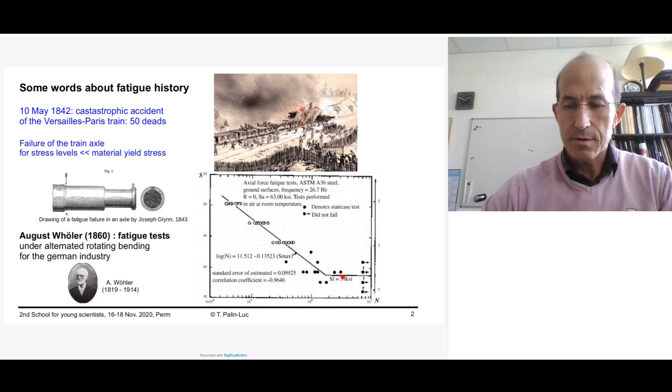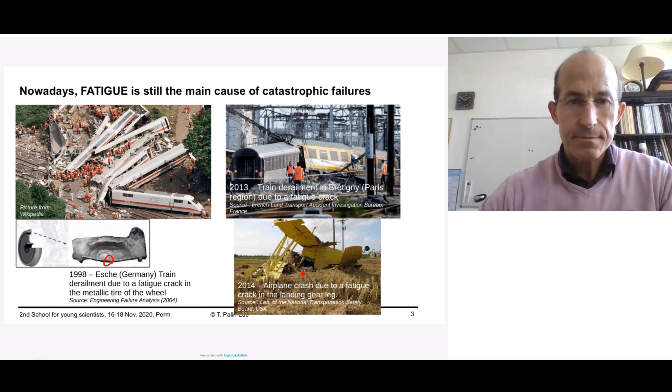So now, what is known about the crack initiation mechanism? As I introduced previously, the famous Wöhler curve, or SN curve as it's named in the US, plots stress amplitude versus the number of cycles in logarithmic scale, giving the variable stress amplitude acceptable by a material or a component with regard to the number of cycles.

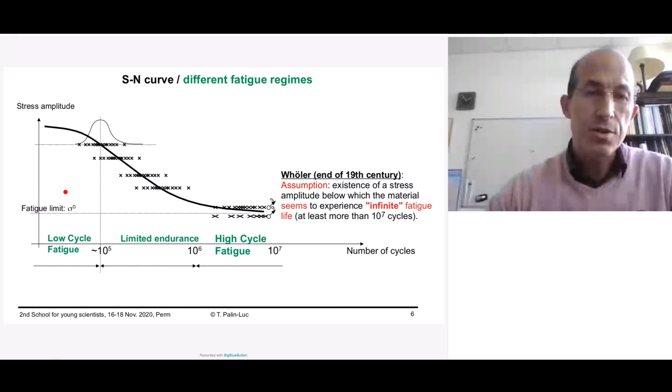Three typical domains can be recognized in this curve: the low cycle fatigue domain, where there is macroscopic plastic strain, approximately up to around 10 to the 5 cycles; then a domain named limited endurance, approximately one decade; and above a few million cycles, there is a high cycle fatigue regime, characterized by macroscopic elasticity, which we will see in a few minutes. This curve has a typical shape with a horizontal asymptotic tendency, which led Wöhler to assume that an infinite fatigue life exists after approximately 10 to the 7 cycles. The existence of this fatigue limit has helped engineers design a lot of structures during the last two centuries.

The fatigue crack initiation phenomenon is characterized by typical features. If you compare the stress level during a monotonic quasi-static tensile test with the fatigue phenomena, you cannot see anything similar in fatigue. During a macroscopic tensile monotonic quasi-static tension test, many macroscopic events like plastic flow above the yield strength, then necking, then failure are characteristic, and if you load the material after yielding there is macroscopic plastic strain. But in high cycle fatigue, for stress levels leading to life greater than approximately 1 million cycles, the stress levels are below the yield strength of the material, and in this case you cannot detect any irreversible phenomena at the macroscopic scale.

But irreversible phenomena exist at the mesoscopic or micro scale. Consequently, fatigue of materials is due to modifications or degradation of the mechanical properties of materials under cyclic loading or thermal cyclic loadings, which creates microscopic irreversible phenomena.

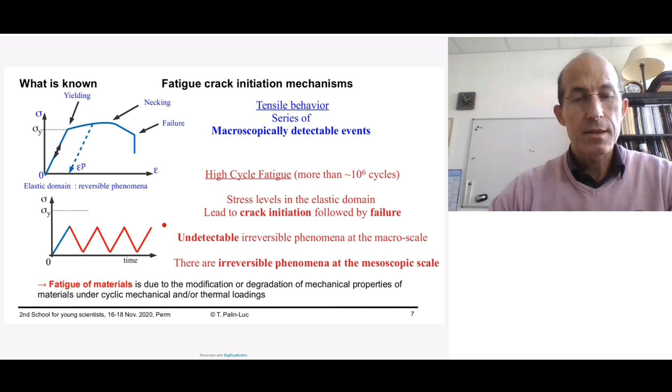These irreversible phenomena start from dislocation in polycrystals, because my talk is restricted to metallic alloys, which are polycrystalline materials. The evolution versus the number of cycles on a pure alloy, this example is on pure iron, loaded up to approximately 1 million cycles. You can see in this picture the evolution of the dislocation density versus the number of cycles. The dislocations appear in black in these transmission electronic microscope pictures.

You can see in this diagram, which plots the dislocation density versus the number of cycles in logarithmic scale, there is an increase of the dislocation density during the beginning of the cyclic loading, up to approximately 100 cycles, and then a saturation plateau. And if you continue the test up to fracture, there is an avalanche phenomenon which creates the crack initiation.

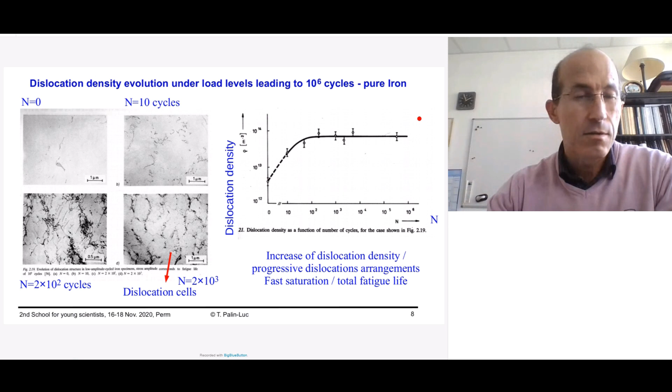After saturation, the localization of the plastic deformation process at the microscopic scale will lead to a collective behavior of dislocations that will create slip bands and then persistent slip bands. It means the collective behavior of dislocations will create, in the crystals or in the polycrystals, some veins which emerge at the surface of the material.

You can see here a scheme of that. In the grain, the red lines illustrate the veins, or the channels of dislocation movement. These dislocations emerge at the surface and will create persistent slip bands which appear at the surface. So these bands are oriented along the directions of the easiest glide directions.

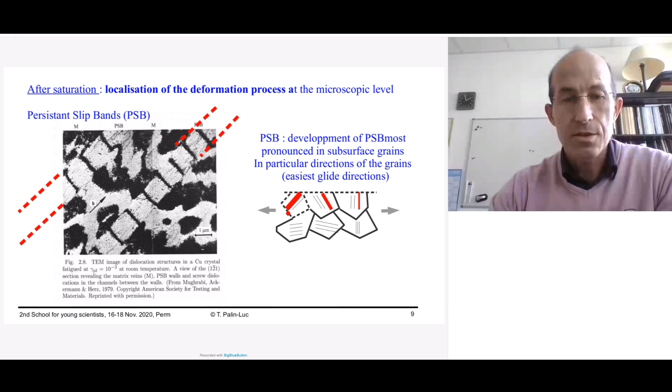You can see here an illustration of such bands. Here you can see the surface of the material and the appearance of extrusions, which are schematically illustrated here with the PSB and the extrusion. And since under cyclic loading, of course, no material is created, if there is extrusion in some area, in other locations there are intrusions. And these intrusions are the precursor, or the locations, of crack initiation.

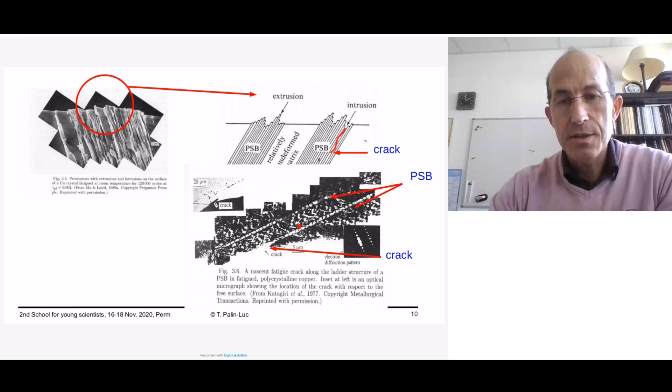You can see here another picture. The surface is at the bottom, and you can see here the bands, and here the beginning of the crack, which is created along the intrusion.

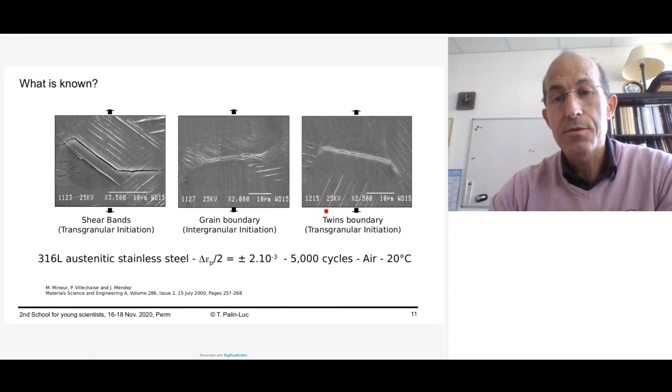We can also observe crack initiation at the grain boundary, but close to the boundary of grains, you can observe slip bands. Finally, the incompatibility of deformations between two grains leads to decohesion between grains, and so the creation of an intergranular crack. It is also possible to observe, within a single grain, a transgranular initiation because of twin, because twin is a defect in the symmetry of the grain or of the crystal.

If I want to summarize the crack initiation mechanisms in high cycle fatigue, mainly the crack initiates at the surface. This is the most common case of crack initiation, from low cycle fatigue to high cycle fatigue, whatever the number of cycles. The difference between low cycle fatigue and high cycle fatigue is that in high cycle fatigue, the crack initiation is very localized. We will come back to that in a few minutes.

So the initiation causes are mainly these. There is usually the appearance of persistent slip bands at the surface within one grain, which indicates transgranular initiation. You can also observe intergranular crack initiation, so between two grains, or along the grain boundary. And it is also possible, of course, to have some defects at the surface, like gas pores for a cast material, or shrinkage, or also inclusions in non-pure materials.

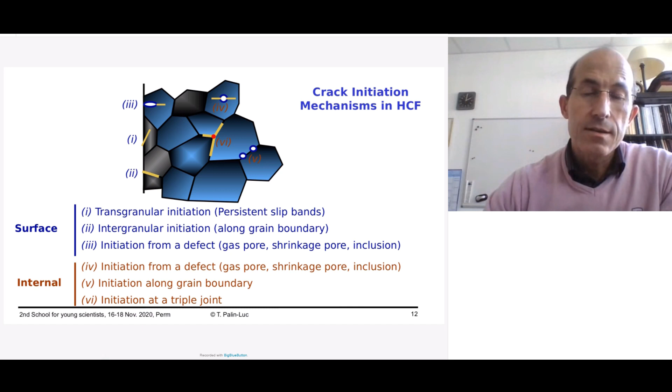Non-pure materials are the case of the most common industrial alloys, where there are always some pollutants, some non-metallic inclusions, etc. In some cases, it's also possible to observe internal crack initiation, even in low cycle fatigue or high cycle fatigue, but they are not very common in pure materials. They are common in industrial alloys because of defects. So again, the defects play an important role, like the pores, the shrinkage, and so on. One also observes initiation along a grain boundary with the presence of defects. And in some cases, which are rare, we observe initiation of a crack at the triple joint.

What's happened after crack initiation? The crack initiation is illustrated here by the nucleation of the shear bands, mainly at the surface, or in most cases, as I explained a few minutes ago.

If you imagine a polycrystal loaded in uniaxial tension, the first stage, named stage 1 in literature, is the appearance of a crack due to shear. That is mode 2 of fracture mechanics. And when this crack is long enough compared to the characteristic size of the microstructure or the grain size, meaning when the crack has a length equal to approximately 5 grains, the crack bifurcates and begins to grow perpendicular to the principal stress. So we are now in the case of long crack growth.

So it is important to understand that the crack initiation is governed by the crystallography and by shear. And when the crack is long enough, the crack propagation is governed by the macroscopic principal stress, that is the opening stress or the principal stress.

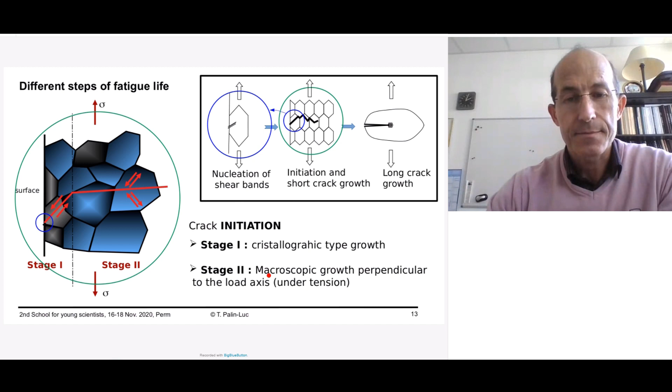This can be summarized in an SN curve depending on the different fatigue regimes, by the following scheme. In low cycle fatigue, macroscopic plastic deformation exists everywhere in the material. Consequently, there is generalized plasticity. Each grain is plasticized, so there are persistent slip bands or slip markings everywhere. This is a regime of low number of cycles to failure.

Then there is a transition. When you decrease the stress amplitude, there is a transition between macroscopic plasticity and elasticity. In high cycle fatigue, macroscopically the material is elastic, so plasticity appears at a micro scale. It means the slip markings are localized in a few grains at the surface and are due to persistent slip bands. And the crack initiation appears in intrusions located at these bands.

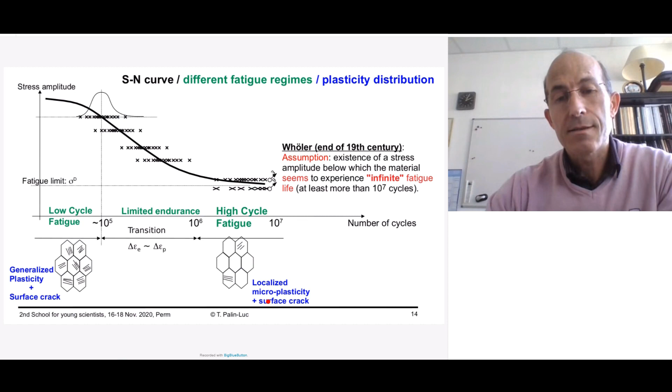Now, if we continue, I mean if you do not stop a test after 10 million cycles with a non-broken specimen, what do you observe? Such experiments have been carried out since the end of the last century by a lot of researchers in Japan, in Germany, especially in France and in the US, and they are named the gigacycle regime or the very high cycle fatigue regime.

It has been demonstrated that in this case, infinite life doesn't exist. It means the assumption made by Wöhler about a fatigue limit was false. In fact, if you have enough time, if you continue the test up to 10 to the 9 or 10 to the 10 cycles, the material exhibits mainly internal crack initiation with the famous feature named fish eye. Such fish eyes are observed typically on industrial alloys.

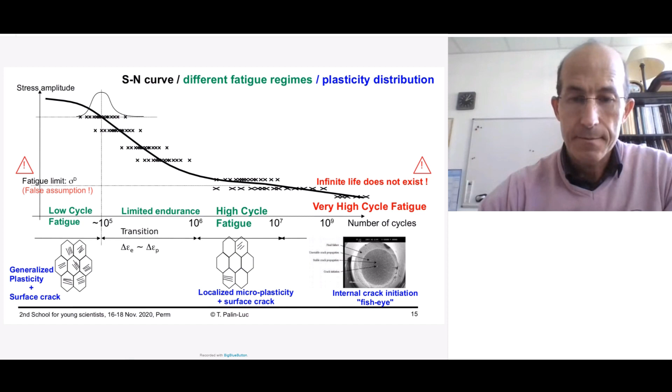The consequence of such evolution of the fatigue crack initiation mechanisms is very important for engineers designing structures, because if you look at the ASTM standard, there is a typical SN curve with the asymptotic tendency according to Wöhler's assumption. In practice, this asymptotic tendency corresponds to 10 to the 7 cycles, because at that time it was very difficult to run many more cycles in a test within a reasonable testing time.

But if you look, for instance, at the famous experiments by Professor Sakai in 1999 on a bearing steel, you can see that if you exceed 10 to the 7, if you go to 10 to the 9 or 10 to the 10 cycles, the asymptotic tendency doesn't exist anymore, and there is crack or failure. So there is no infinite fatigue life.

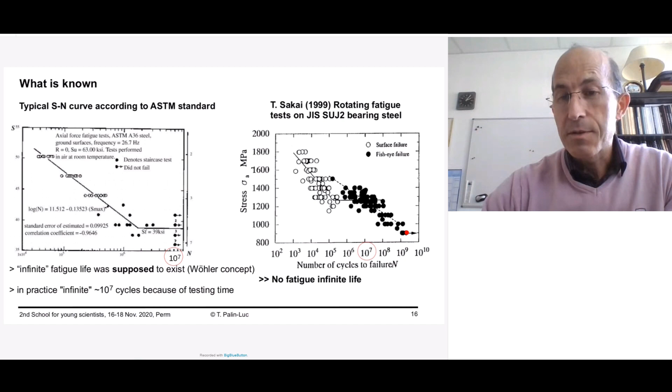So the internal crack initiation appearing in the gigacycle regime, when the load level or stress amplitude is low enough, leads to this typical fish eye. Within the center of the fish eye, the part responsible for the crack initiation is an inclusion.

Other experiments and a review of many fatigue tests proposed by Professor Mughrabi in 2002 show that, in fact, on pure metallic alloys, the mechanism of slip band crack initiation at the intrusion-extrusion is still valid, but there is no threshold for persistent slip band appearance. It is a question of number of cycles. If you decrease the stress amplitude but wait for enough loading cycles, finally slip markings appear at the surface, and finally cracks initiate.

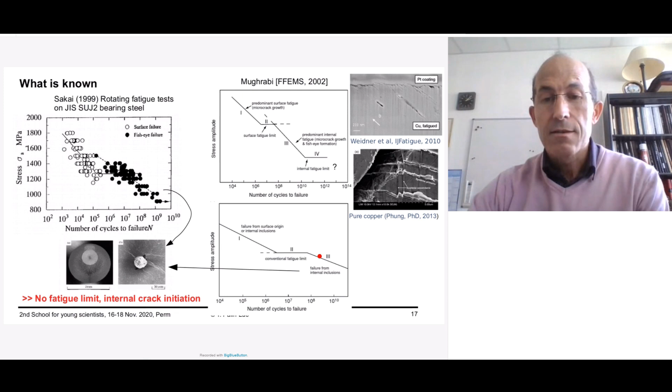So up to now, no tests have been done above or at 10 to the 11 cycles, so we don't know if there is a real threshold for persistent slip band appearance. This is a question. But for industrial alloys, there is always crack initiation on industrial defects like inclusions.

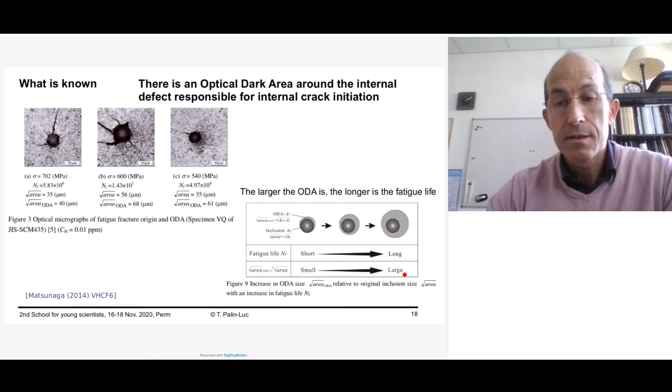So up to now, we don't know exactly why there is this optical dark area. We will come back to that in the challenge.

So to summarize what we know about crack initiation mechanisms: high cycle fatigue failure and very high cycle fatigue failure are due to microscopic cyclic plasticity. Dislocations and the appearance of persistent slip bands at the surface of the alloy are responsible for these crack initiations. The initiation first starts in mode 2 of fracture mechanics, meaning crack initiation is governed by shear, because shear governs microplasticity.

Then the microcracks propagate up to long cracks and bifurcate when the crack length is large enough compared to the characteristic size of the microstructure, then propagating in mode 1. This is stage 2 of crack propagation.

Another important thing that is well known is that in metallic alloys, crack initiation is mainly governed by the surface of the material in high cycle fatigue and low cycle fatigue. But when the number of cycles to failure increases up to 10 to the 8 or 10 to the 9 cycles and more, in the very high cycle fatigue regime, crack initiation shifts from the surface to the core of the material, and non-metallic inclusions are responsible for this crack initiation in the core.

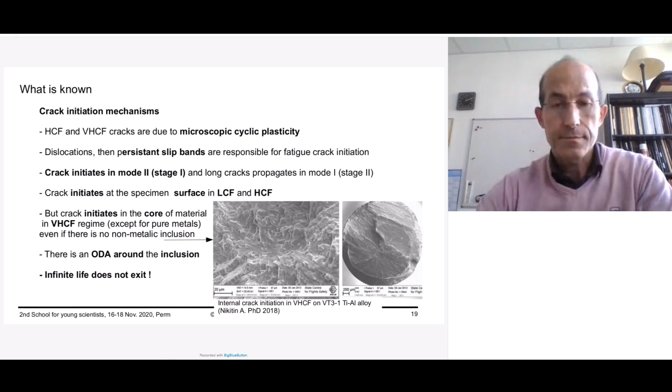Now I'm talking about the factors influencing fatigue crack initiation - what are the technological factors responsible for crack initiation in components? We will see four main factors: surface roughness, quality of the surface, residual stresses, stress concentration factors or notches, illustrated here for instance with a key seat on a shaft of a motor, and material defects, either due to the manufacturing process of the material or the process to produce the components. Of course there are many other factors, but because of lack of time I cannot present all of them.

For industrial applications, temperature has an effect on crack initiation. There is also an effect of component size, because the larger the specimen or component, the higher the probability of finding defects. The environment also plays a role because of corrosion problems or corrosion aggression on the material, and hydrogen embrittlement also plays a role in crack initiation and propagation. In some cases, for specific alloys, loading frequency also matters, though this is less frequent. We consider that in metallic alloys, if the loading frequency is lower than approximately 200 or 250 Hertz, there is no effect.

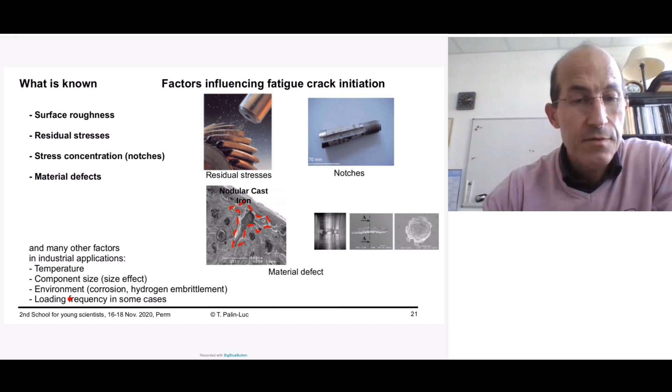Now, first about surface roughness. A typical SN curve, stress amplitude versus number of cycles, illustrated here by Professor Itoga from Japan, shows this: the famous SN curve with different plateaus representing the evolution versus number of cycles from low cycle fatigue to gigacycle regimes. If you increase the surface roughness - meaning the profile height is worse and worse, as you can see here - you will decrease the bearable stress amplitude, or in other terms, the material reduces its fatigue life for a given stress amplitude.

This is illustrated also in this SN diagram on a titanium alloy produced by selective laser melting, which is an additive manufacturing procedure. These data come from a PhD thesis in my institute on a titanium alloy. You can see that in black, this is roughness produced by hot rolling, and in red is as-machined, as built by SLM.

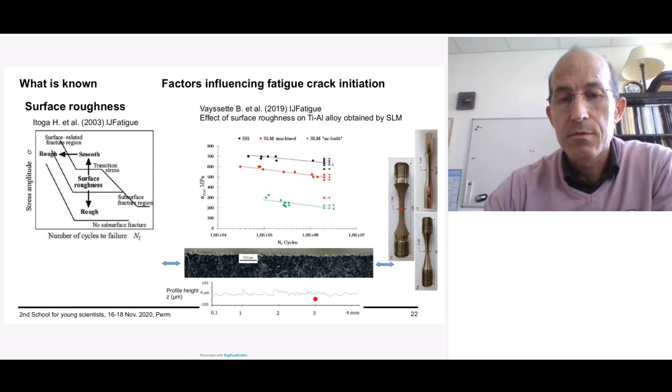In green, this is an as-built SLM surface with bad quality. You can see here the roughness, which is very bad. The scale here is 500 micrometers. So if you do not machine the roughness to improve the surface quality, you have a very sharp decrease of the fatigue resistance, approximately a factor of 2. This proves that roughness is very important in fatigue resistance, because the valley of the roughness profile plays the role of a micro notch.

Another important factor in real components are the residual stresses. Residual stresses are the stress inside the material without external loading. Of course, they are in equilibrium, but they are produced by external loading in order to reinforce or modify the surface layer of the material or the components. A typical treatment is shot peening. Shot peening produces plasticity at the surface, and this plastic region is compressed by the rest of the material surrounding it. The elastic material compresses the plastic zone.

So this treatment is very well used in industry, for instance, in order to increase the fatigue resistance of gears. Another treatment is laser shock peening, where there is no ball creating plasticity, but a laser impact which produces a plasma, and the wave due to this plasma creation will produce plasticity.

So the consequence of such surface treatment is that if you look at the residual stresses versus the depth of the material, you obtain such a profile: a compression state at the surface, and in the depth, a peak in tension in order to have the equilibrium. The peak in compression at the surface is very good for fatigue resistance, because the compressive residual stresses are a static stress in the material which opposes the tensile opening stress of the cyclic loading. So the compressive residual stresses will increase the fatigue resistance.

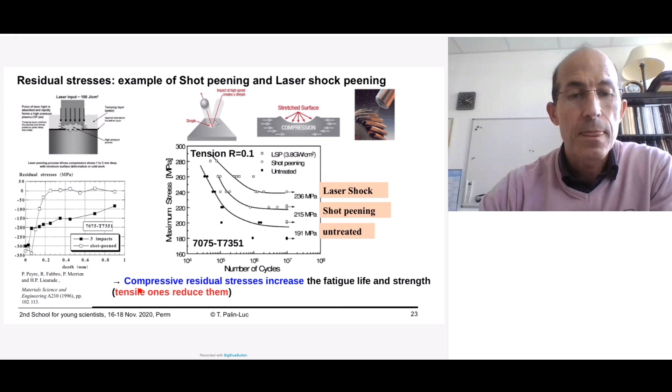You can see an illustration in this SN curve in tension with a positive mean stress on an aluminum alloy. The reference material has a fatigue resistance around 190 megapascal, and it is increased by shot peening or laser shock peening by a significant factor. So this is very important in fatigue, for designing components, to consider the residual stresses. They are favorable to fatigue resistance in compression, and they are deleterious if they are in tension.

What is also known is that on components, the stress concentration due to the notch of the geometry plays a role of stress concentration, and consequently, since the local stress is increased, the fatigue resistance is decreased, as illustrated here on an SN curve. You can see the smooth specimen here with a theoretical stress concentration factor close to 1. When it increases, the fatigue resistance decreases very significantly, because, be careful here, this is a log scale.

So for instance, at 10 to the 7 cycles, the fatigue resistance could be around 90 megapascal, whereas it was around 300 megapascal on the specimen. This is very important for design, because the reason for many failures of real components is illustrated here by an example of a crack failure originating at the key seats on the shaft of a huge diesel engine.

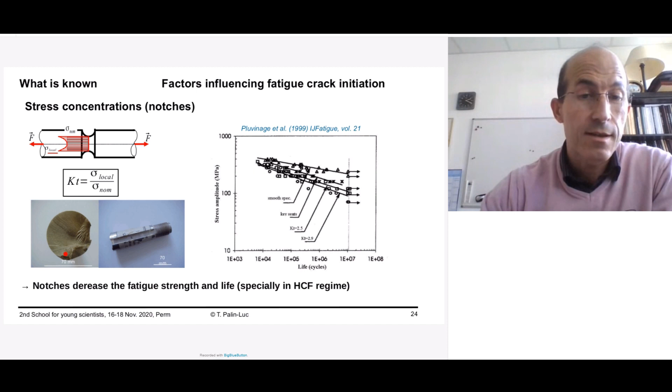But in real components, there are also defects, and the defects, as I said, are also a micro notch, geometrically or mechanically speaking, with a scale here of typically 200 micrometers. This notch can also exist at the root of a macroscopic notch, or at the root of a gear's tooth, for instance. There is a competition between the stress concentrations, which promote crack initiation, and the defects.

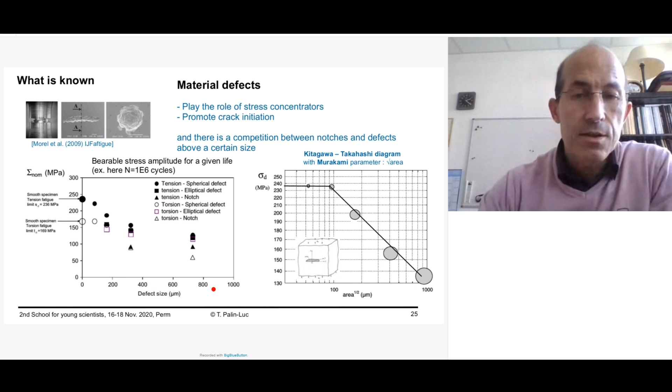So now, what about fatigue modeling? There are many models in literature, more than 50 fatigue strength criteria, and maybe 50 more, or 100 more, for fatigue life calculation methods.

They are classified in two main categories: stress or strain-based approaches and energy-based approaches. In the stress-strain-based approach, there are global approaches based on invariant quantities and critical plane approaches. These critical planes are the most famous because the crack initiation is oriented along one direction of a plane. So there are macroscopic approaches like Matake and McDiarmid, and also mesoscopic approaches, which consider the microplasticity at the grain size.

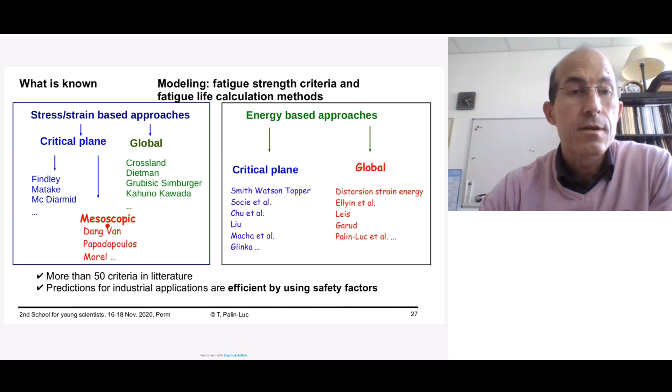There are also energy-based approaches, again with an oriented critical plane approach and a global approach. I don't have enough time to present everything, so I will present two approaches from the stress-strain based category.

Before presenting these two approaches, it's necessary to emphasize two very important stress effects in high cycle fatigue regarding mean stress. If you consider a cyclic loading with different mean stress, and the cyclic loading is a normal stress—meaning a tensile stress—the tensile stress has a very important effect on the fatigue resistance. If you plot the variable stress amplitude versus the mean stress, this diagram is called the Haigh diagram. You can see a very important effect of the positive mean stress on the variable stress amplitude.

There are different models, but all predict an important effect when you increase the tensile mean stress. But on the opposite, if you look at the shear stress amplitude, depending on the mean shear stress in high cycle fatigue—around 10 to the 7 cycles and more—there is no effect. You can see a plateau here. The stress amplitude in shear is not affected by the mean shear stress, approximately up to a maximum shear stress equal to 80% of the yield strength in shear. This is very important because all simulations consider these two effects.

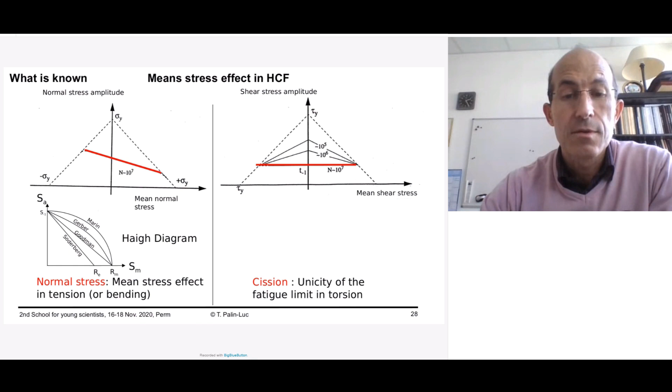What is the general principle of multiaxial high cycle fatigue strength criterion? It is the following: you have a component here submitted to cyclic loading or cyclic forces. At each point of the component, you compute the stress tensor versus time. Representative quantities of this stress and strain have to be used in mathematical equations for a given survival probability.

If I illustrate that in a two-variable diagram with criteria that are the most common, there is a threshold plotted in blue corresponding to a given life—for instance, 10 to the 7 cycles—and a given survival probability, typically 0.5. If the point representing a material point on the component is above the threshold, it is a dangerous case: crack initiation will appear before the given number of cycles with a given failure probability. On the opposite, if the representative point is below the threshold, it is in the safety domain—according to the model, there is no risk of crack initiation before the given number of cycles and for the probability you are considering.

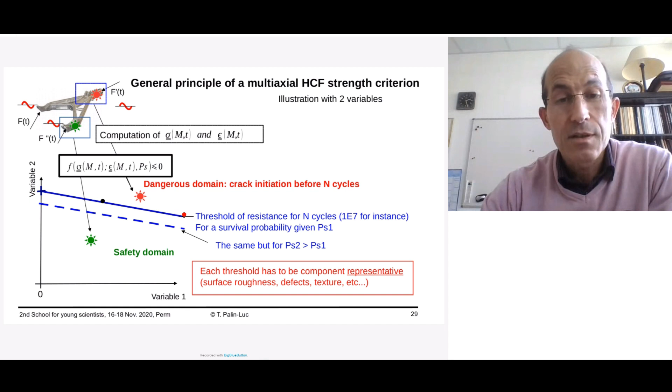Each threshold has to be representative of the material state and of the component state—meaning representative of the defects, the roughness, the texture, etc.

Which quantities are used to compute such mechanical approaches? Since the crack initiates on the material plane in the polycrystal, the authors of the criteria use quantities defined on the plane. The quantities defined on the plane in mechanics are the normal stress—so there is the stress amplitude and the mean stress on the plane—and also the shear or shear amplitude on this plane, and the mean shear stress on this plane.

They are also computed with an invariant approach. A stress tensor can be divided into a deviatoric stress and a hydrostatic or spherical part. Consequently, you can define the amplitude and value of the hydrostatic stress, and also the amplitude and mean value of the deviatoric shear stress tensor, which is given by the square root of J2. J2 is the second invariant of the deviatoric stress, or, if you want, the von Mises equivalent stress.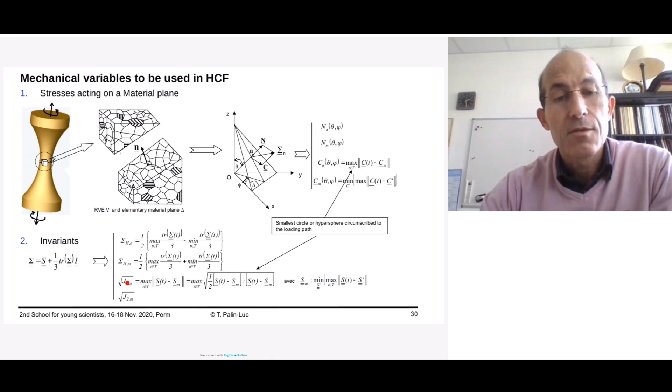So on a plane, we can illustrate that as the following. On a given material plane delta with a normal n, there is a normal stress and a shear stress, which are the two components of the stress vector at each time t. So the extremity of the vector of stress describes the load path, and its projection on the plane, as you can see on the right, is used to define the mean shear stress and the shear stress amplitude.

So the mean shear stress is the center of the circle surrounding the load path, and the amplitude of the load path is nothing else but the radius of this circumscribed circle to the load path. This is important because this definition is invariant, whatever the loading is, proportional or not proportional, complex or not.

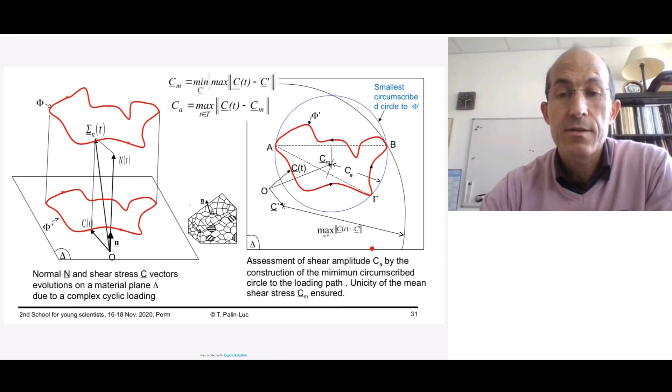In the literature, as I said, there are many criteria: empirical ones, strain-based criteria, energy-based criteria, stress-based criteria, macroscopic ones and mesoscopic ones. I'm presenting you today only criteria based on a stress-based approach, with critical plane approaches at the macro scale and at the meso scale.

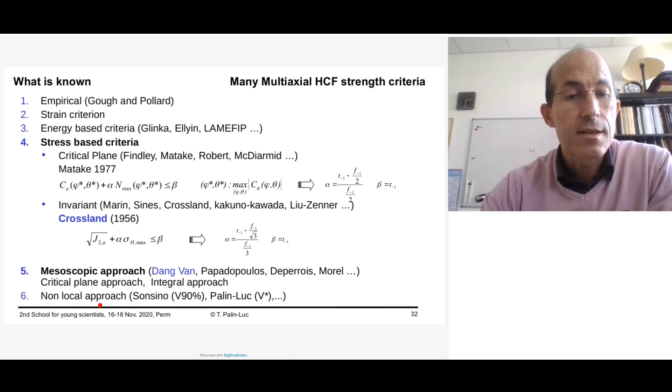I'm presenting one approach at the macroscopic scale, named the Crossland approach, which is a linear combination of the hydrostatic stress and the amplitude of the deviatoric invariant. I'm also presenting in a few minutes a mesoscopic approach proposed by Dang Van, the pioneer in the mesoscopic approach. We will see that they are nowadays used also for numerical simulations. It's important to show that there exists a non-local approach to predict the effect of the notch, but I don't have enough time to present that today.

So first, the Crossland criterion is based on two important hypotheses. I told you that the mean shear stress has no effect on fatigue resistance in high cycle fatigue. Crossland uses this assumption, and also uses the fact that if there is a micro defect, the opening stress of these micro defects in all directions, which is hydrostatic stress, is very deleterious to the crack initiation phenomenon. So he proposed the simplest combination of a shear amplitude, since there's no effect of the mean shear stress, with a linear combination of the macroscopic hydrostatic stress and its maximum value.

So the maximum hydrostatic stress is easy to compute. This is the maximum value of the trace of the stress tensor at each point. The amplitude of the deviatoric shear stress is defined by this equation, which is nothing else than the radius of the sphere in the deviatoric space - the radius of the hypersphere surrounding the load path in the deviatoric domain.

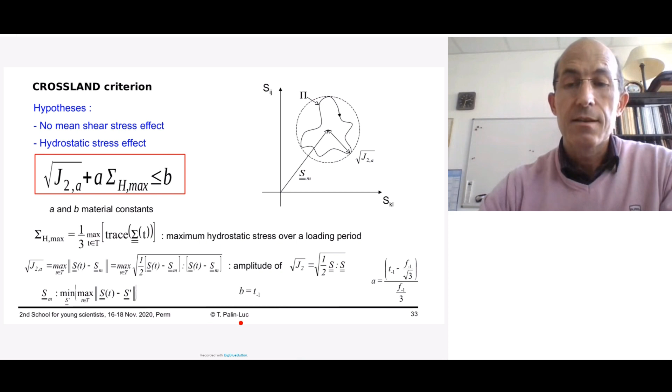Another approach, which is very famous, is the Dang Van one, based on the assumption that to prevent crack initiation, we need to prevent microplasticity at the grain scale. So in fact, this criterion is a sort of plasticity criterion at the grain scale. There is no initiation, in other words, if there is elastic shakedown.

This crack initiation is also affected by hydrostatic effect. So Dang Van considers a linear combination, like Crossland, of the hydrostatic stress at the mesoscopic scale and the shear stress vector amplitude on the material plane. This criterion predicts that there is an elastic shakedown of the shear versus the shear strain. So you can see that at the macroscopic scale, there is a decrease of the mean shear stress when you look at the grain scale. This is due to the assumption of the criterion.

And in this case, like for Crossland, the diagram plots versus time the evolution of the amplitude, or norm, of the shear stress vector in a material plane against the evolution over time of the hydrostatic stress. And like for Crossland, there is a threshold depending on the material properties, the number of fatigue cycles considered, like 10 to the 7, and the probability of failure.

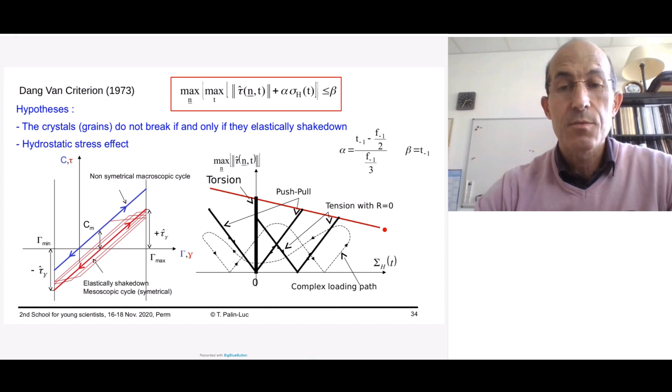This fatigue strength computation can also be done by finite element analysis, and especially for approximately 10 or 15 years, by finite element analysis at the grain scale. We named that polycrystal plasticity modeling.

So the interest is to be able to reproduce a representative volume element with the grain. The typical size here is a few hundred micrometers, and each color here represents one grain, meaning one crystal with its own crystallographic orientation.

It means its own slip systems, elastic behavior, but also elasto-viscoplastic behavior. The challenge is to represent the effect of grain size and shape, crystallographic orientation, the anisotropy of the grain, the effect of the surface or the internal of the material, the difference in stress state depending on grain location, and also the phase orientation. You can imagine modeling a material with different phases, different mechanical properties like ferrite martensite or ferrite pearlite, bainite, etc.

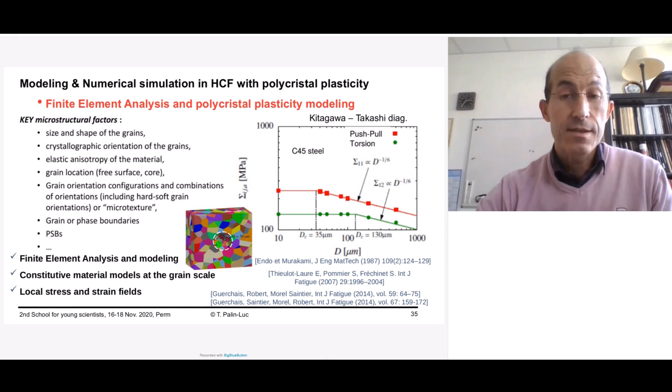So this approach is able to model the metallurgic or metallographic effect on fatigue resistance and the competition with a defect. You can see here a volume with a defect in the middle, an hemispherical defect with diameter D of 50 micrometers. The challenge is to reproduce the Kitagawa-Takahashi diagram, which illustrates the effect of defect diameter on fatigue resistance. This can be done numerically, fully numerically.

The constitutive behavior of the grain is given by different behaviors. There is cubic elasticity to reproduce the anisotropic grain or crystal. And there is also a crystal plasticity behavior, which is in fact viscoplastic. This is a model written at the grain scale on the different slip systems.

A slip system is for one material plane. You can see here the crystal with a given material plane oriented by its normal, and the slip systems are on this material plane, in different directions L, where the slips can occur. The cyclic hardening and cyclic softening of the material are written by equations for each slip system, defined by the normal to the plane, vector NS, and the vector LS, fixing the direction of sliding.

One example is the model proposed by Meric and Cailletaud at the end of the last century, but you can find other models proposed in literature, and there are very famous simulations done in literature by Fionn Dunne and colleagues in the UK.

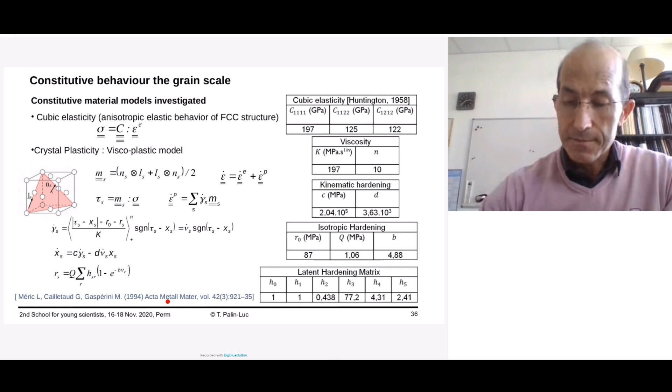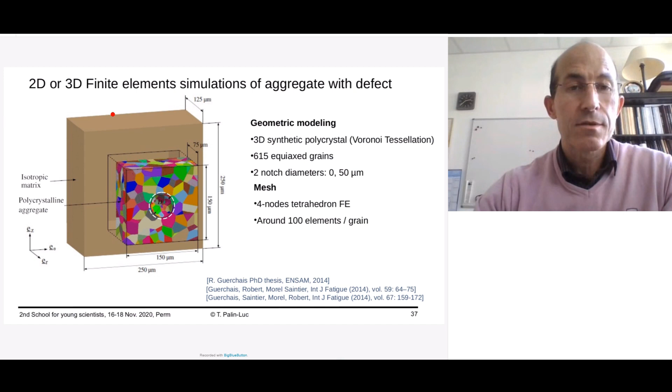The results are either in 2 dimensions or in 3 dimensions. I'm presenting here, because of lack of time, only 3-dimensional finite element results on aggregate. You can see here a polycrystalline aggregate with a defect in the middle. To avoid parasitic effects due to the boundary condition on the polycrystalline boundary, this volume is embedded in an isotropic matrix, which is elastoplastic. Then the boundary conditions to simulate either tension or shear are applied on the free surface of this volume.

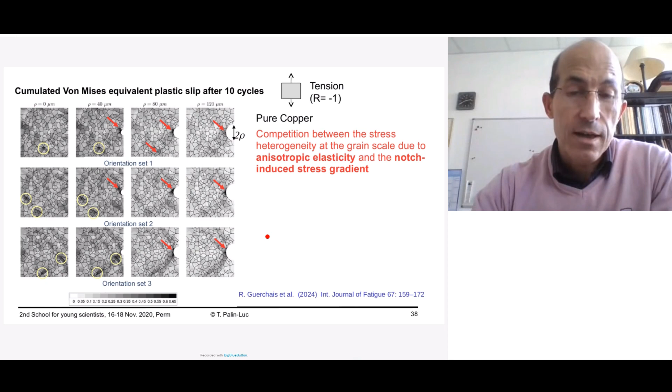Depending on the grain orientation and on the loading, different hotspots of cumulated plastic strain appear in the microstructures. Of course, the hotspots depend on the grain orientation.

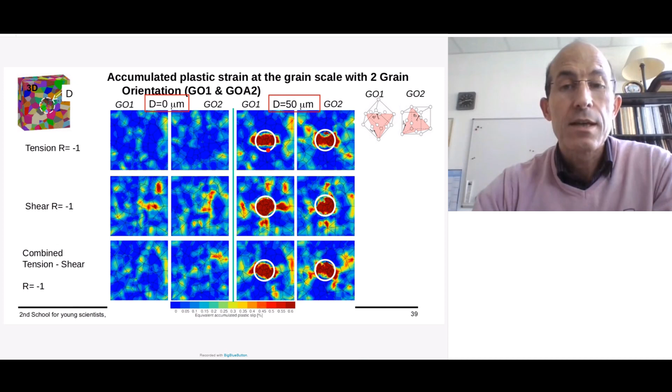As a conclusion of what is known, we can say that modeling high cycle fatigue with strength criteria is mainly done in literature with analytic or semi-analytical models. The calculation of quantities representing crack initiation is done with an important assumption: that the material must be stabilized cyclically speaking. This is important because in the criteria you compute everything on a single load cycle, and you assume that your quantity will not change if the loading is repeated maybe 1 million or more cycles.

I don't have enough time to show you, but the predictions are in agreement with many experimental data. But all the mechanical things are not very well understood without numerical simulation. So finite element and polycrystal plasticity modeling are very interesting and promising for explaining the interaction between defects and microstructures. They can also be used to explain the effect of texture—grain orientation—and grain shape or morphology, such as the effect of lamination or elongated grains on fatigue resistance.

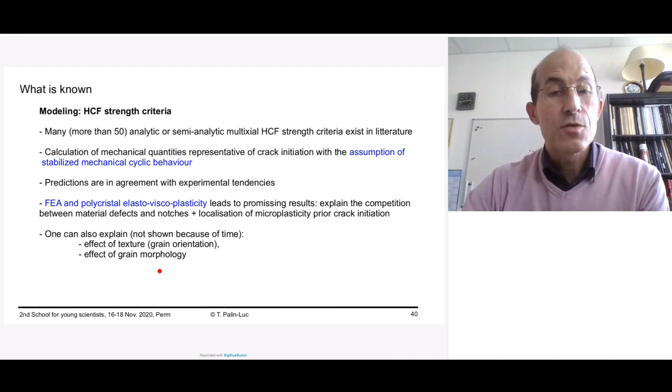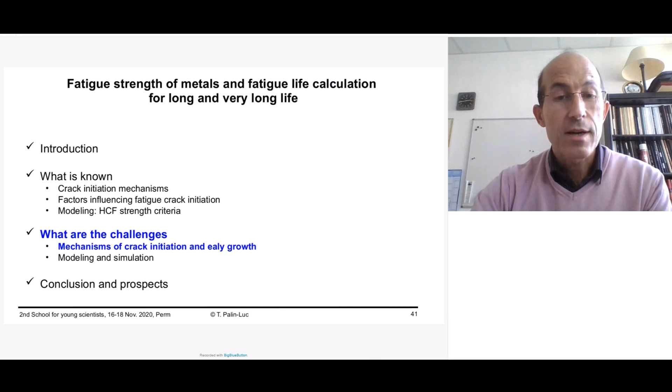But finite element analysis and polycrystal elasto-viscoplasticity are very powerful tools in order to explain that. What are the challenges? First, the challenges in order to better understand the mechanisms of crack initiation and the first stages of crack growth after initiation.

I told you that in the gigacycle regime, when there is an inclusion responsible for crack initiation, in the famous fish-eye features, there is an optical dark area around the internal inclusions. To explain that, a possible scenario proposed by Sakai in 2014 is the following.

Around the inclusions, there is a fine granular area which is formed because of micro debonding between the inclusion and the matrix. This micro debonding, because of repeated cyclic loading, will create accumulation of microplasticity and the creation of a fine granular area because of recrystallization.

This has been observed by Sakai by cutting a specimen with an inclusion and a fish eye. He observed by transmission electron microscopy that in some locations around the inclusion there are very small grains, nanograins, which do not exist elsewhere in the material. He said that this recrystallization into nanograins is due to the cyclic loading and microplasticity accumulation around the inclusions.

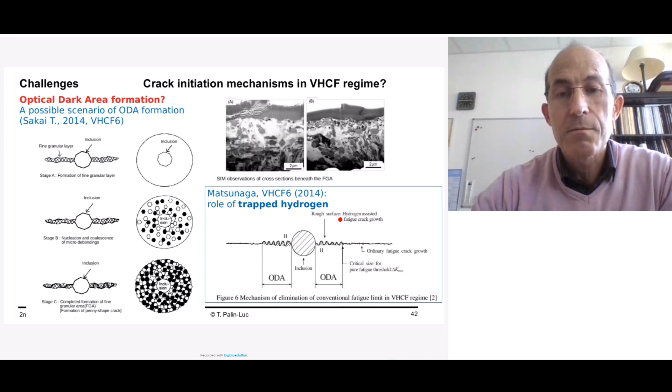It is very difficult to measure the quantity of hydrogen around one inclusion. A very promising scenario is also proposed by Professor Youshi Hong a few years ago.

Around an inclusion, the scenario is very close to Sakai's, but it explains why there is an optical dark area when part of the cyclic loading is under compression. That's why the model is named numerous cyclic pressing, like compression—the phenomena don't occur where mean stress is high enough to have the cyclic load only in tension.

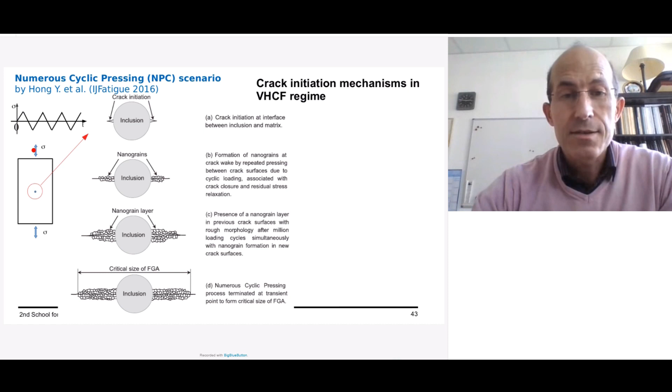So when there is a part of the cyclic loading under compression, after the initiation of the crack by debonding around the inclusion, there is refinement of the grain, like in Sakai's scenario. The nanograin formation increases because of the pressing of the external cyclic loading, and this increase in nanograins will finally create micro cracks which open.

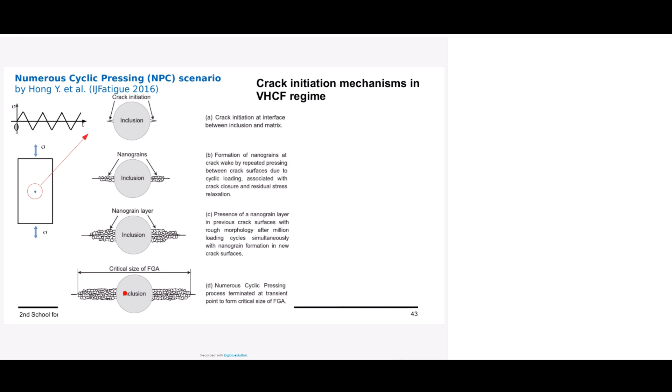The growing of these open micro cracks will lead further, and the size of the fine granular area, or the optical dark area, corresponds to the size of the region where there is nanocrystallization, recrystallization.

But in some cases, there is no optical dark area, only a fine granular area. This is the case, for instance, in titanium alloy. This is an example of pictures by Nikitin in his PhD, and some pictures here obtained in a recent paper published in Materials Science and Engineering with Professor Hong, Nikitin and co-workers.

We have observed in titanium alloy, by micro-machining with a FIB, very thin layers observed by TEM. We observe that even if there is no inclusion at the crack initiation area, like here, you see there is no inclusion, but very close to this area, if you observe by transmission electron microscope, you can see nanograins.

So it means recrystallization exists even if there are no inclusions. This is very interesting to explain why there is crack initiation without any defects. Of course, this has to be confirmed by other experiments, because up to now we are the only authors who observed such a scenario.

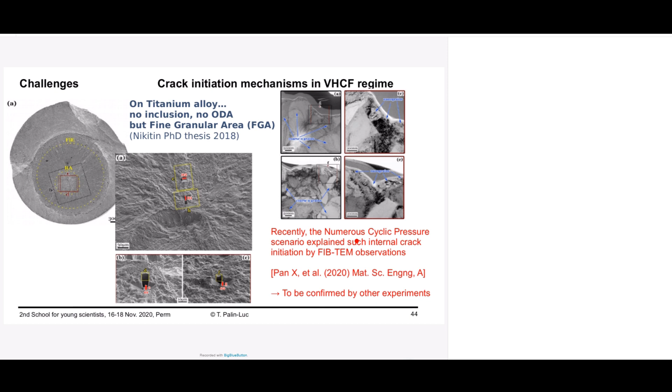To finish with the challenge about the mechanisms, it is also important to understand how internal microcracks interact with the microstructure in the very high cycle fatigue regime. So to do that, we recently did, within a national research program named GigaDef, like Giga Cycle Fatigue with Defects, an in situ synchrotron Giga Cycle Fatigue experiment.

We moved an ultrasonic fatigue testing machine to realize 10 to the 9 cycles in a reasonable testing time. So 10 to the 9 cycles at 20 kilohertz needs only 12 hours. With this system, it is possible to observe simultaneously the specimens with X-rays due to synchrotron radiation and an infrared camera, and we also coupled this with a laser vibrometer in order to detect the crack initiation.

What we did is use a specimen with an artificial internal defect produced by casting. This defect is voluntarily put here in the center of the specimen in order to localize the area where we have to observe the phenomena.

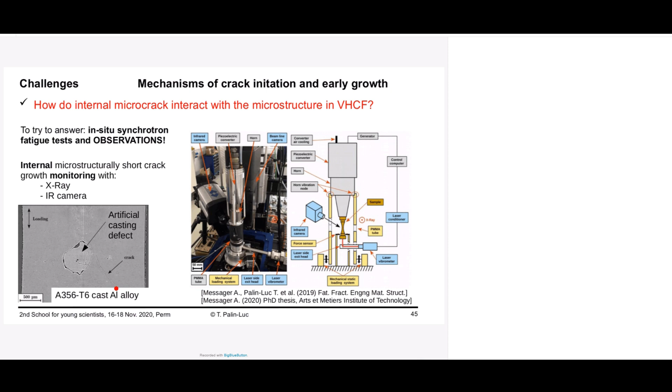You can see here a crack. It is difficult to observe here because of the lack of light, but you will see on the next slide. So we were able to observe in situ, directly, step by step, the evolution of the crack with a non-destructive technique.

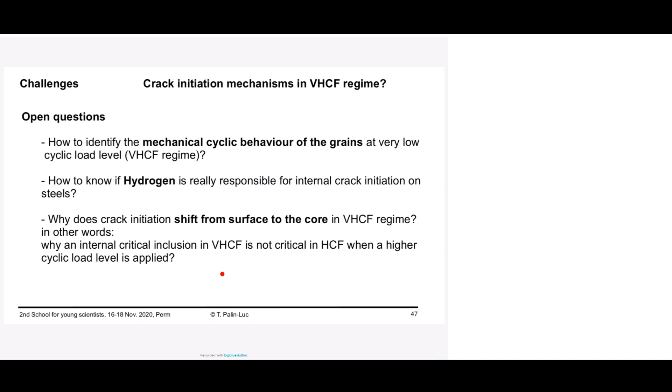It is also difficult to measure why the crack initiation shifts from the surface to the core in very high cycle fatigue regime. In other words, why an internal critical inclusion in gigacycle regime is not critical when you increase the stress level. This is a very important open question.

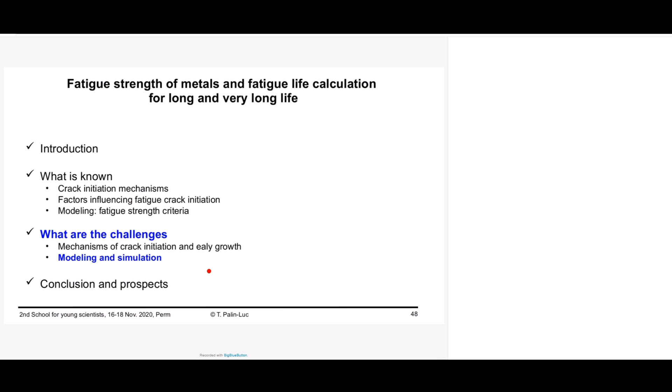Finally, about the challenge in modeling and simulation. The challenges are the following. Finite element simulation with polycrystal plasticity explains a lot of things, but it is very long and needs very big supercomputers and a lot of computer resources, so it is very costly in time and energy. Applying such a strategy for a component is impossible, because the quantity of grains in a component with a typical size of a meter is enormous, and up to now it is impossible even with supercomputers in the world. So we don't know if this is a good strategy.

Maybe a probabilistic analytical approach is a good compromise for being able to reproduce the physics at the large scale, or at the scale of a component. This is an open question. But for a better understanding of the physics at the small scale, the coupling between ab initio simulation at the dislocation scale and finite element analysis is very interesting. There are a few research works and papers about that, but it needs giga simulations, a giga computer.

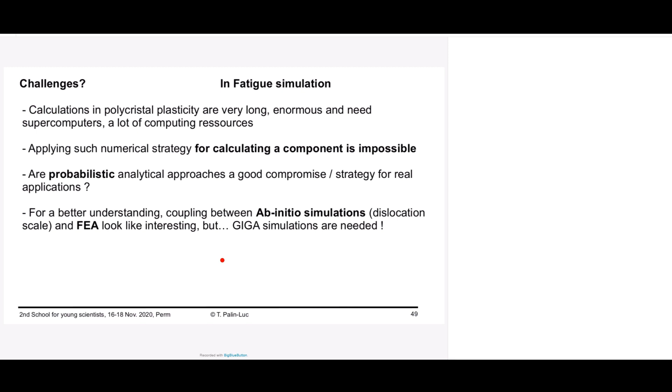As a conclusion, I can say that progress in fatigue understanding comes from experiments, and especially from in situ monitoring of the material and its damage evolution. A very nice paper published 5 years ago by Bufford and co-workers in Nano Letters shows a film. I do not show it here because of lack of time, but you can download the film, it is free, it is open on the internet.

But a good synergy is needed between monitoring and fatigue tests if you want to couple that with numerical simulations, because up to now the numerical simulation efforts need to be too huge to explain everything, according to my understanding. I am convinced that the improvement is coming from thinking out of the box, with new monitoring techniques of reality. I am convinced that the improvement of knowledge is not coming from simulation alone, but from new experiments.

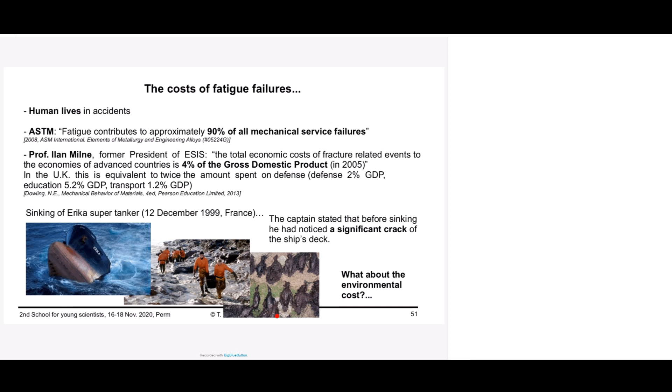But there is also another cost for future generations that is important: the cost with regard to environment. If you look at a catastrophic event like the super tanker Erika close to France in the last century, the economic cost is important, but the environmental cost, as you can see here with many kilometers of beach covered in oil and a huge quantity of killed birds, is also very important.

Consequently, since the cost of fatigue failures is huge, I think many scientific works still have to be done in fatigue of materials and structures. I am convinced that observations and monitoring of damage due to fatigue are mandatory to progress. In situ observations are very important. Thank you for your attention.